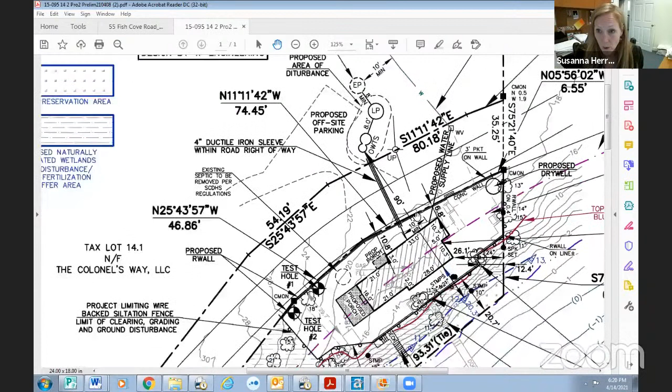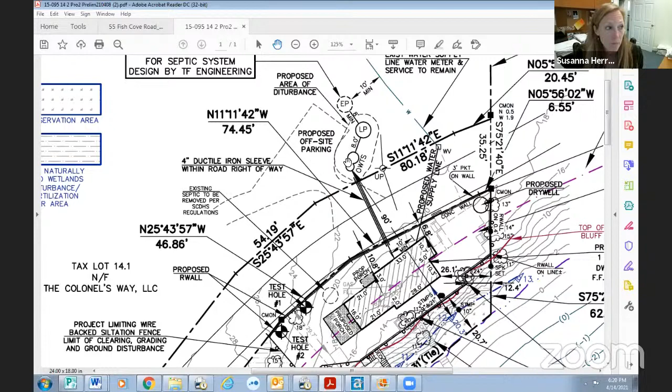Because they own the property across the street, and because this property is highly constrained, we've agreed to locate the sanitary system across the street on their other property, which is about 20 acres. There's plenty of room so they can achieve a much better wetland setback. It will be a denitrification system on the opposite side of the road. The existing system is probably 20 feet from the wetlands line, so we're greatly improving that situation.

In addition, parking for this cottage will be located across the street in an already existing gravel parking area, an offshoot of the main driveway for the adjacent property, used for parking for this proposed house. Obviously easements would be required for that, but we're willing to go through that process to get an easement from one property to the other, and also from the town to put the septic line underneath the road.

The existing house is 8 feet from the wetlands. We've kept pretty much the same square footage, a little bit more living space compared to the existing house, which is all on the survey here. The coverage stays basically the same. They're eliminating the boathouse and the shed, and the new house would have a footprint of 977 square feet. It's just a 1-story house with a screened porch.

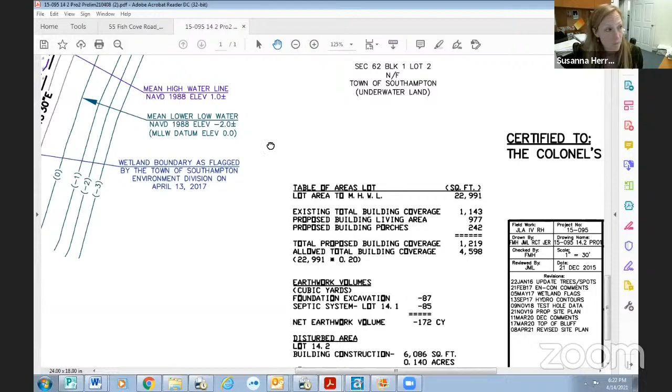It's been designed to be as long and skinny as possible in order to achieve the best possible wetland setback and setback from the top of the bluff.

As I mentioned, the retaining wall that goes along the top of the bluff will be removed. There's also a retaining wall along the street that's going to be reconstructed. But we've made great efforts and met with Marty a couple times at the property and made multiple revisions to downsize the house and improve the proposed site plan as much as possible. A lot of work has gone into the project.

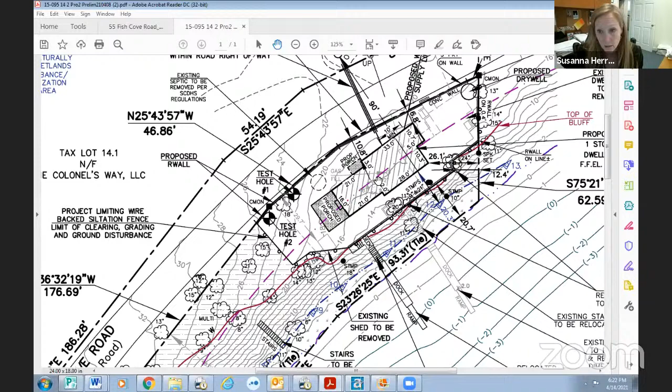We've also presented a revegetation plan. Can you see that? There's only a tiny area of lawn on the property and a 5-foot gravel walkway that would go around the house, and the rest of the property would be revegetated with native vegetation according to this plan.

There's existing steps that go down the bluff to a dock that needs to be reconstructed. That would be reconstructed using open grate decking and non-treated wood. We're also relocating that over to the south, to a location where the bluff is not as steep, so it will have less impact and less potential erosion to the bluff there.

You can see on this plan, it's a little harder to see on the survey, but you can see the circles here. These are all trees that are to be preserved and protected. The landscape architect has put together a tree preservation plan where there's a secondary project limiting fence that will be added after the initial house is removed in order to protect the roots as well as the entire tree.

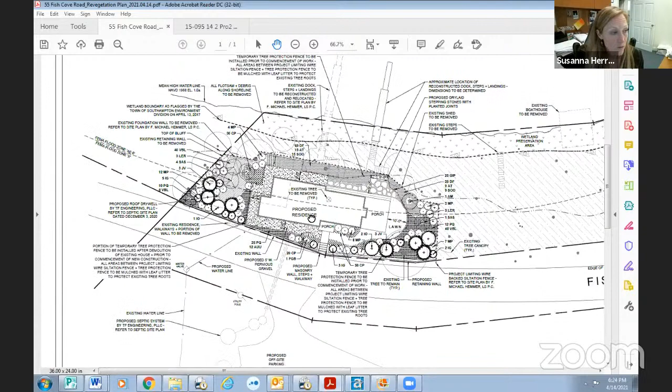So the homeowner is very vested in protecting the environment and protecting the property, preserving the bluff, preventing erosion, and we've tried to put together the best possible project for this site. We've put in a lot of work. So if anyone has any questions, that's basically the project.

Susanna: the purpose of the retaining wall? The one along the road, no, the retaining wall that's there now is to be removed. It's been there probably for 100 years. It only goes down about 7 to 12 inches below grade, so it's not really doing anything right now.

The existing foundation wall of the existing house, as I mentioned, is 8 feet from the wetlands and right at the edge of the bluff. That retaining wall/foundation wall is what's holding up the house. And there's actually a tree growing out of that. I don't know if I have a good picture of that.

Why are we removing the retaining wall? Because it's not providing any structural support at this point and is only going to continue to crumble and cause potential erosion.

Well, my concern is if you remove what you have there, is it possible that there may be some erosion into the cove? I don't think so. We're going to have a project limiting fence put in place ahead of time, and the foundation and the retaining wall are going to be removed by hand. There's no heavy machinery required. I mean, over time, and rainstorms and so forth and so on.

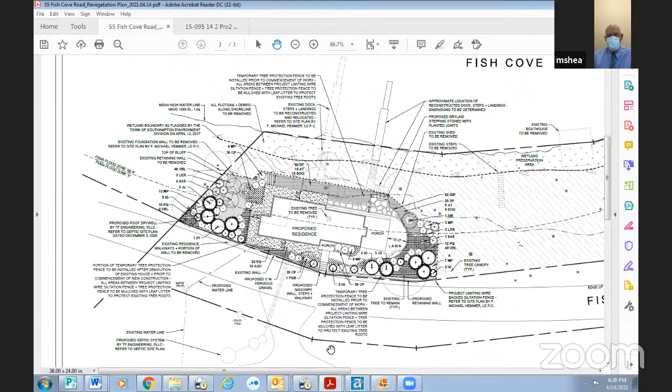As you can see, when Karina panned out, this is actually a very long piece of property along the shore of Fish Cove. The entire remainder of the property outside of the new house footprint is going to be covenanted as a wetland preservation area and naturally vegetated wetland non-disturbance, non-fertilization buffer. In addition to the boathouse, there's considerable storm-borne debris along the shore, which the applicant has agreed to clean up.

As was indicated by the applicant, one of the primary focuses of our evaluation of the site conditions was not only slope protection, but preservation of the existing large trees at the site. Whereas earlier plans, as discussed in my preliminary advisory report from July 22nd, 2020, could have resulted in very significant impacts.

This plan that you're seeing is well thought out. It works for the site. It has the environmental sensitivity that's needed. So I can say that I fully support this plan.

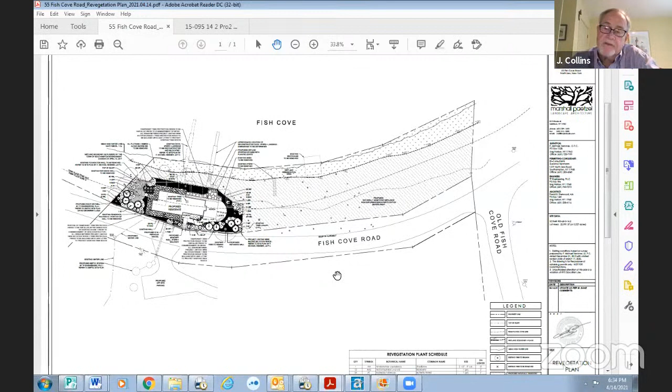Excuse me, Susanna, this is Jerry Collins. Do you anticipate any problems with cutting into the road to bring the septic system, plumbing over to the other side? Have you approached the town about that?

Just very preliminarily, but we don't anticipate that there will be a problem. It's been done before. I've spoken with the health department, who I assumed would have issues with it, but they have approved much bigger projects where the septic system is across the street, including, as Marty pointed out to me, the new condos along the canal. Those have a septic system across the street, and an easement was worked out with the town for that situation. So I don't anticipate that there will be a problem with that.

Good, I think it's a great plan. I'm happy to see it. I didn't think it was possible to put the septic across the street, but I've been proven wrong, to my surprise. So the applicant has agreed to do that, and we don't have to cut down trees for that. That was the way we were able to save a lot of the trees that were going to come down, because in order to put a septic on this site, we were going to need retaining walls and regrading and a long septic system with lots of rings. So this is a much better system. Absolutely, yeah, it's a great plan.

Susanna, two questions. One is, what is the setback from the bluff of the new house? It's 10 feet. And with the existing house, it's 0.

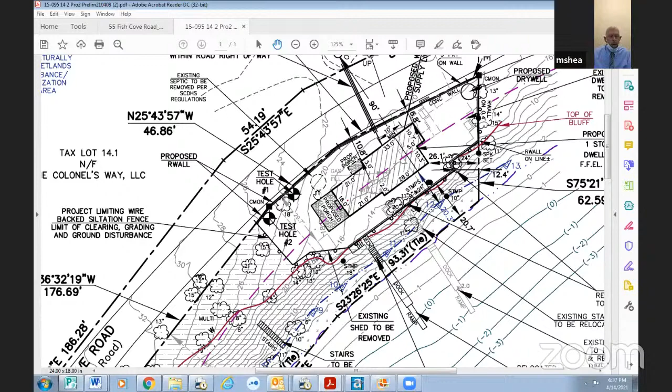I can also assure the board that in the event the Suffolk County Department of Health Services wants to see a generator, I'm happy to work with the applicant to find an appropriate location for that generator. I also don't think it's going to be necessary, but in the event that it is necessary, we can locate that on the site within the planned site disturbance area.

A generator for the septic system would not be a very large generator. It doesn't use very much power. Or you could get an easement to use the bathroom on the other side of the street too.

That's a joke. What's with the house on the other side of the street that they own? They own both properties, you said, right?

Well, there's an existing house on this site. It is a single and separate lot. And it would not be permissible under zoning to put another cottage on the property across the street.

This house that's on there now, in the present condition, when was the last time someone lived in it? I don't know off the top of my head, but not since we started this process a couple years ago. Pretty dilapidated, correct? Correct. I think this is a horrible plan.

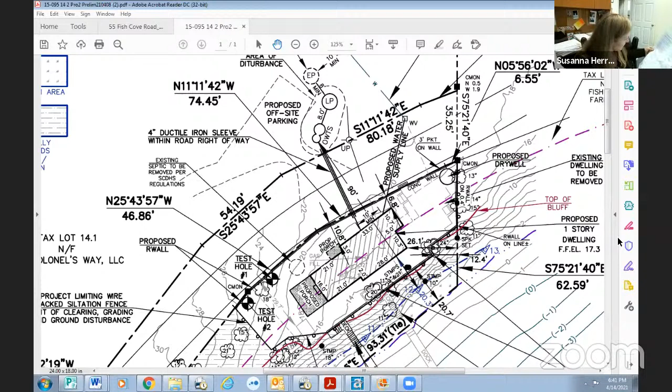The lot area is over half an acre, 22,991 square feet. Most of that's being preserved. And just to correct the numbers for the record, the existing house is 8 feet from the wetlands. The new house would be over 20 feet from the wetlands.

Let me zoom out. You may be getting a false impression because I'm so zoomed in on the small area of the building. Here's the entire lot. Everything on the southern portion of the property is going to be left completely natural, and it's heavily wooded. We located some of the trees on the property, but we didn't locate every tree in the forest. So this entire area—it's not a forest, it's a wetland.

Well, it is on wetlands, but most of the property is forested, and we're cutting down only one tree in order to reconstruct a house farther from the wetlands. The septic system that's there now is probably 20 to 30 feet from the wetlands, and is just a hole in the ground. So we're putting in a denitrification system across the street, which is obviously far superior.

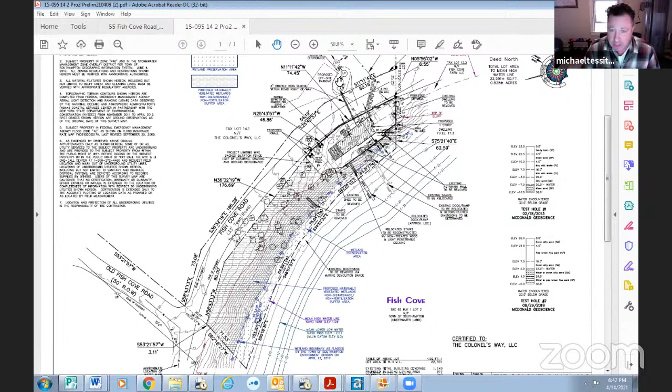I think that's great. I think that's awesome that you thought outside the box to do that. I just think that this project's ridiculous.

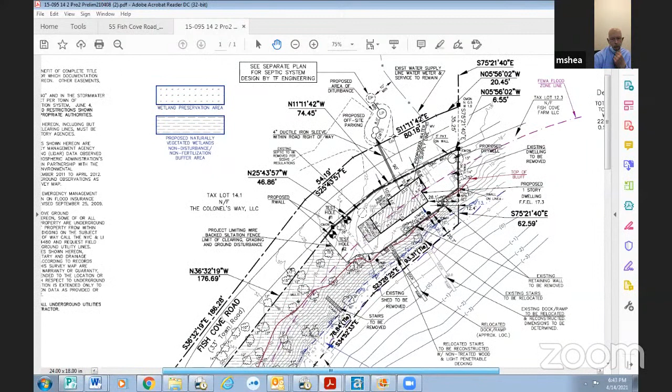We had initially explored whether or not the existing residence could be repaired or partially reconstructed in the same footprint. I had a lot of concern about doing that because the existing residence is perched right at the edge of a very steep slope, and there's a crumbling supporting retaining wall. So I thought it made a lot more sense, rather than try to repair that house in its existing location, to build a new house on the flatter ground.

The house, of course, is pre-existing non-conforming, so the landowner benefits from grandfathered setbacks from the road. That's what enables the landowner to build within very close proximity to the road. As indicated in my preliminary advisory report, I had very significant concerns about trying to reconstruct the house in its present location.

This plan again is the product of the applicant and I spending a lot of time considering various alternatives. The possible location of the sanitary system across the road was one of the recommendations I made early on, and it's good to see that has worked out, because I think if we had to locate the sanitary system adjacent to the residence, it would be very difficult to rebuild the residence without very significant adverse impacts. I don't think you could build a residence where that building was.

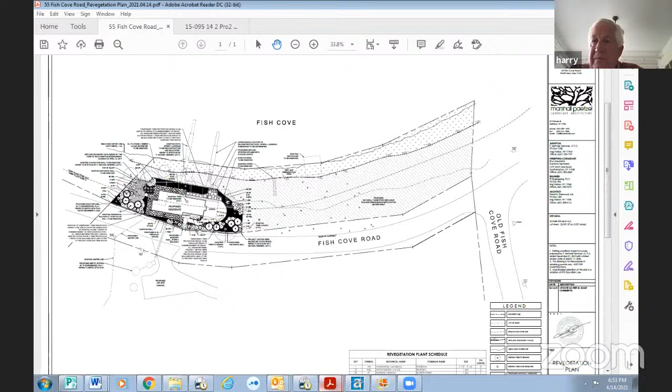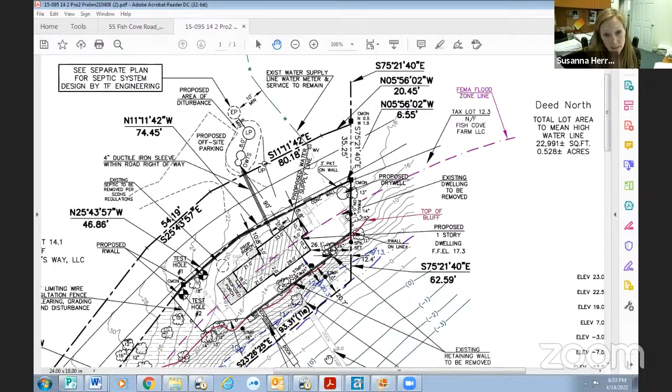Yeah, we did explore that opportunity. One reason this project has taken so long to come to a hearing is because we've been exploring different alternatives and meeting with staff to improve the project, to look at every potential impact and to mitigate that and to lessen that to the greatest extent possible.

If you look at the footprint of the existing house, it's very close, within a couple feet of the property line, and this adjacent property is wooded. So if you were to try to dig a new foundation, which would be necessary, the foundation that's there is not in a condition that could really be preserved. It needs to be replaced. It's crumbling, not constructed to current standards as far as the safety of the foundation, stability.

In order to dig a new foundation in this area, if you walk the property line, you'll see there are trees, and the roots for those trees would have to be severed. You would risk damaging the roots on the adjacent properties.

Removing the house can be done quite easily because the foundation is not very deep, and it could actually be done by hand with no heavy equipment. So that's something that's been taken into consideration. You just haven't been part of that.

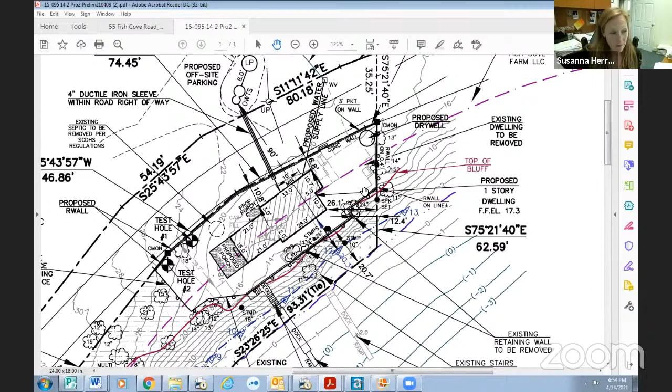I actually wanted to bring this to the board much sooner and show you all the iterations we've been through. The house has been looked at from every possible angle, different locations, flipping the house and the septic system on site, building in this footprint, expanding to the south.

Then when we realized we could put the septic across the street, it became very obvious that the solution was to move the house to the flatter, clear part of the property where we could achieve a greater setback in a location that is not as steeply sloped.

The bluff in this portion of the property is not nearly as steep as it is directly in front of the existing house. So by constructing a new house as opposed to working within the existing footprint, you can redesign it so it's skinnier and thereby achieve a better wetland setback.

We're going from an 8-foot wetland setback to 20.7 feet. And we're going from a 0 bluff setback to 10 feet, in an area that's much more stable, much flatter, and we don't risk injuring the trees that surround it, with the exception of one lone tree that unfortunately sits right in the center of this area.

But if you were to reconstruct in the initial location, you would risk all of the trees along the property line here and the bluff. So this is a much better solution.

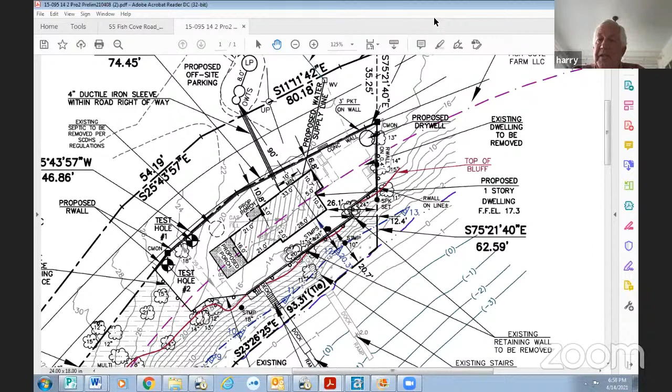And if any other board member wants to chime in, I'm all ears. Essentially, what it comes down to is how many board members want to close this hearing, how many want to adjourn it. I want to adjourn it. So we've got 2 people that have said they want to adjourn it.

I don't have a problem holding it open one more time. There's 3, I don't care. Whatever's on the next meeting, one more. I would go along with them, not adjourn the meeting, and let Michael and anybody else who wants to see it. I'll agree, go with that as well.

So we have to keep this hearing open for one more. We have 3 hearings scheduled for the next meeting, April 28th, and 3 the following meeting, and 3 the following meeting. The testimony has been done here.

There is not an obvious conflict here that we do sometimes have. And I suggest that perhaps there's not going to be a major conflict, so it may go fairly quickly when it comes up again. I say that hesitantly because I never know for sure.

So I'm going to suggest that we adjourn it then for 2 weeks to April 28th, if that is okay with the rest of the board. I'll make that motion. I'm okay. Second that. It's been moved and seconded. All in favor? Harry, aye.

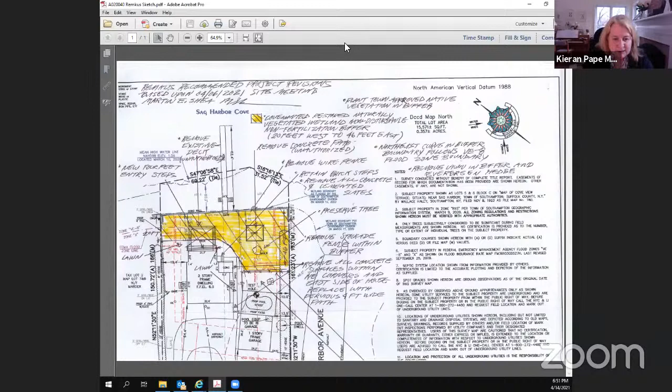Marty was generous enough to take his time and really go through the property with us. It's an old house. It has a pre-existing garage. Marty came up with a plan that allows my client to have a pool, and it also allows for a buffer. He's going to remove his deck. We're very happy with the proposed conditions that we worked out with Marty.

Marty: Yes, we actually probably spent about an hour and a half at the property looking at every practicable alternative for the site, looking closely at the site conditions, the existing improvements, the conditions of the property, and what makes sense in terms of moving ahead. As was indicated during the first hearing, there is an unauthorized deck area on the seaward side of the house, as well as an unauthorized stone patio.

You'll also note that on the east and northeast side of the house, there's considerable concrete slab and cemented slates.

What we found would work out best for this site is to have that deck and patio removed, as well as to take out all of the concrete improvements on the east side of the residence, to replace that cemented walkway with a pea stone path, to maximize the covenanted naturally vegetated wetland non-disturbance, non-fertilization buffer at the property in a manner that protects a large maple on the site.

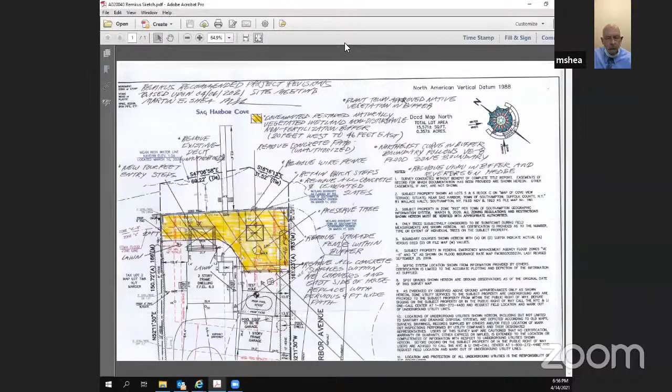So the area where the pool is proposed is an existing disturbed lawn area. The remnants of a lawn on this property are not fertilized or maintained with chemical.

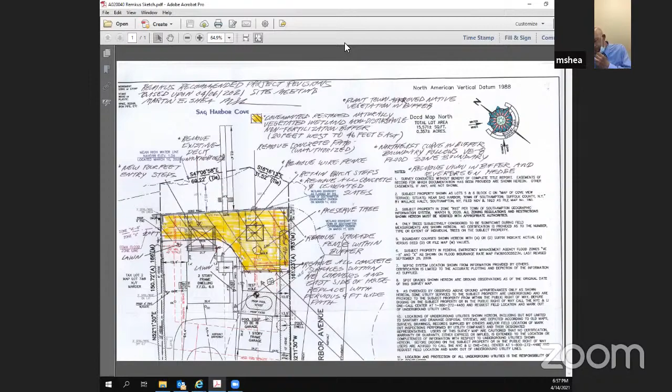Thank you, Marty. Yes. Does the board have any questions? Okay.

Is there a motion to close this hearing? So moved. Close the public hearing. Second. Motion made and seconded, all in favor? Harry, aye. Jerry, aye. George, aye. Ann, aye. Tom, aye. Michael, all right. Sunshine, aye.

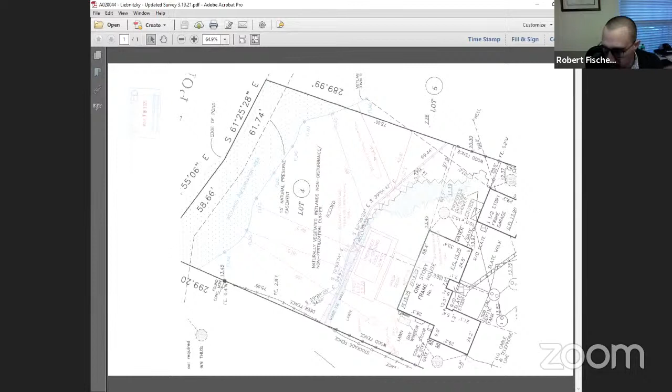Since the last meeting, my client had some good, productive conversations and communications with Marty. They met a couple of times and exchanged some sketches, and Marty went back out to the property to take another look. The result being that the pool was shifted significantly to the west. The wetland setback increased in the various areas to 81.5, 82.3, and 85. This spot on the east, changing from the original 69 we had proposed, to 85 — a significant shift. The buffer is increased, especially on the east side.

This was all brought to a final understanding just in the last day or so, so we have not had a chance to add this to the survey. So what we're hoping — and I'll let Marty confirm for himself — is to adjourn to the April 28th meeting to put this onto the survey. But we believe, and again Marty can confirm, we have some understanding as to what we're doing.

Marty, is that — we don't always have to have all the plan, everything on the survey, in order to close the hearing, but there will have to be an updated survey to issue a permit. Yes, so by all means, we're happy to conclude as much as possible, and then we understand we have to get the final survey.

Okay, all right, Marty? Yes, Karina, if you could put the sketch that I did up on the screen for the board.

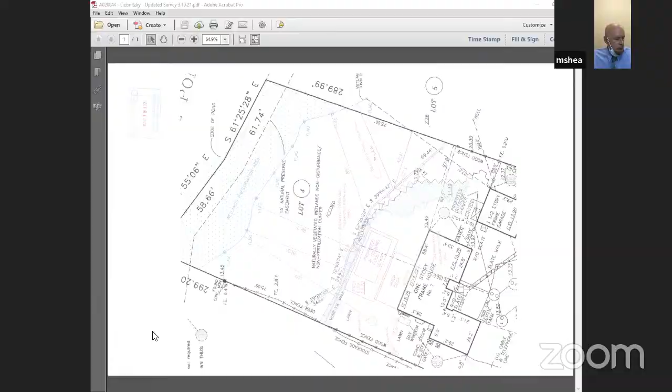I would start by saying that the landowner and I have given this project a considerable amount of attention with regards to undertaking the required practicable alternatives analysis, and the applicant is offering to do several things. Right now, there's an existing treated wood deck attached to the residence. The applicant has offered to demolish and remove that deck and replace it with an untreated deck, which is most beneficial on a property like this that fronts a freshwater pond.

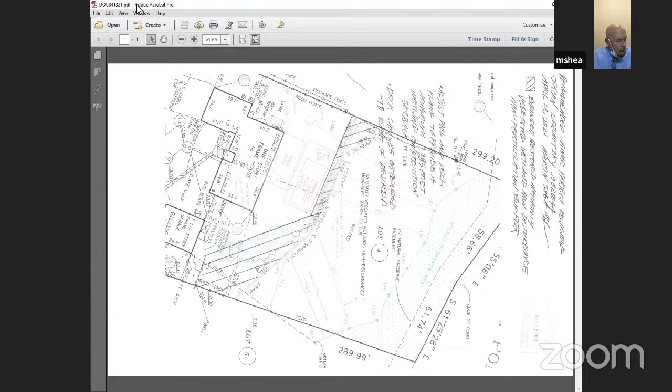The applicant has, by redesigning the pool and the new deck and shifting the improvements to the west, significantly increased the wetland setbacks by as much as 20 feet from the former plan that was considered at the last hearing.

The applicant is also agreeing to provide for considerable additional woodland buffer. The east side of the property, to the right of the pool, is an area that gradually slopes down towards wetlands, whereas the area where the pool and deck is proposed is flat, level ground, much more suitable for building. The slashed area you're seeing on this plan is the additional covenanted restored buffer zone that I have recommended, which the applicant has wholly agreed to. That would enable us to expand upon the existing forest in the most environmentally sensitive areas of the property.

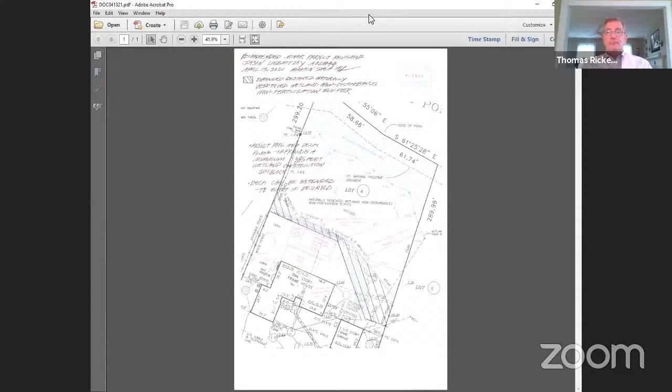Motion to close the public hearing. Second. All in favor? Harry, aye. Jerry, aye. George, aye. Ann, aye. Tom, aye. Michael, aye. Sunshine, aye. Thank you.

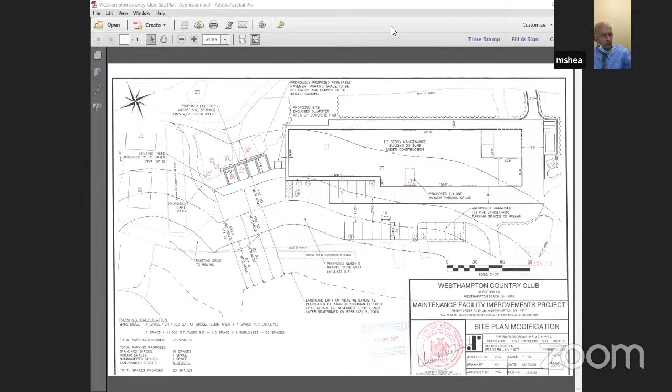Motion to send those comments to the planning board. Second. All in favor? Harry, aye. Jerry, aye. George, aye. Ann, aye. Tom, aye. Michael, aye. Sunshine, aye.

For the ZBA, Liliana Danzo. Briefly, this is a site that is partially in the Village of Quogue and partially in East Quogue. It's an existing residence that borders a freshwater creek.

The Conservation Board had issued a wetlands permit in order to make some minor improvements to the existing residence. The permit was conditioned upon establishing a covenanted wetland preservation area and restored buffer area, which the applicant has agreed to.

The plan does need minor variances from the zoning board. They had submitted an initial survey, which was not entirely consistent with the Conservation Board approved survey. The ZBA has just forwarded an updated survey today, which is consistent with the plan approved by the board.

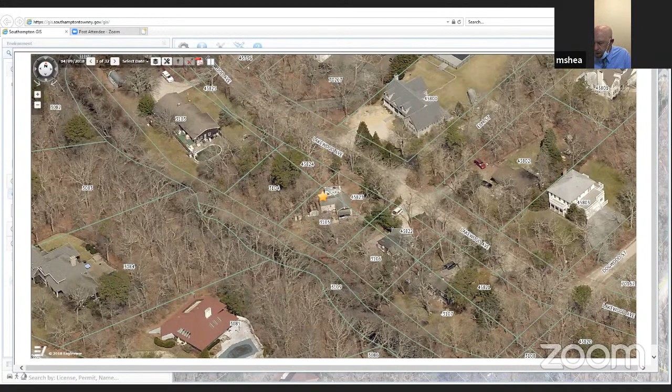So this is an advisory report which supports the necessary relief in order to go forward with the Conservation Board approved plan.

Motion to send those comments to the ZBA. Second. All in favor? Harry, aye. Jerry, aye. George, aye. Ann, aye. Michael, aye. Tom, aye. Sunshine, aye.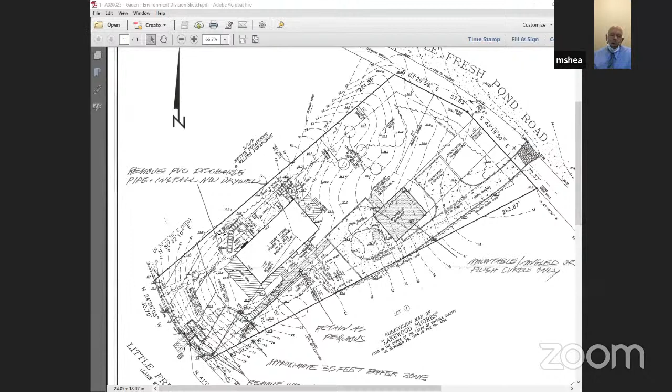The current drive slopes down from Little Fresh Pond Road to a pervious stone parking area. There's an island with mature mountain laurels that aren't faring that well. The applicant has been attempting to prune them so that they'll recover, although the applicant is now proposing a parking area that would require removal of those mountain laurels. He is willing to attempt to salvage and relocate those mountain laurels to the seaward side of the house.

The meeting with the landowner was a good opportunity to educate them about concerns regarding deck construction along pond shorelines. We spoke a lot about the issues related to stormwater runoff and the risk of contamination when you have a sloping lawn. The deck was actually built with treated wood, so the applicant was proposing to remove the treated wood and replace it with untreated wood.

The deck was built in a pre-existing small brick patio area. The applicant has since agreed to remove those wooden improvements in their entirety to create a simple, heavily wood mulched path leading down the slope to the pond shore, and to establish a significant buffer on the pond side of the house. The lawn would be taken up and the area restored with sweet pepper bush, mountain laurels, sedge, and other indigenous vegetation.

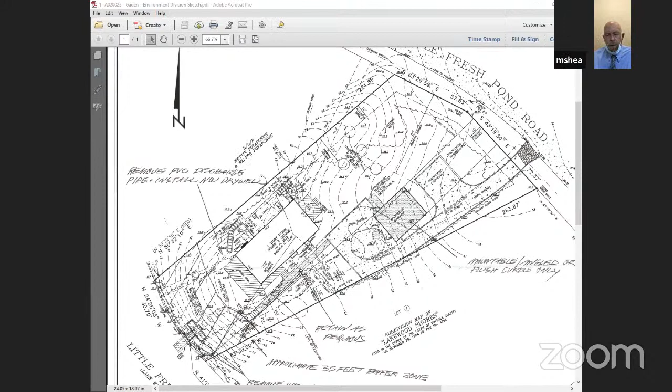So the applicant well understands the need for these changes to his plan, as well as to establish a naturally vegetated, covenanted buffer. As the applicant has agreed to the recommended mitigative measures, you have sufficient information to make a determination on this application. Accordingly, I'm recommending that the public hearing requirement be waived.

Motion to waive the public hearing? Second. Resolved that the Town Conservation Board hereby waives the public hearing pursuant to Chapter 325, Section 325-80 of the Town Code. All in favor? Harry, aye. Jerry, aye. George, aye. Ann, aye. Tom, aye. Michael, aye. Sunshine, aye.

A021004, Laura Boden and Lucas Torres. This application relates to a house which is undergoing renovations along the well-developed Grant Boulevard in the hamlet of Hampton Bays.

As indicated in my April 12, 2021 advisory report, the property has frontage on a dug basin, referred to as a yacht basin. It has a very narrow boating navigation inlet that connects to Tiana Bay, so it is an area where we need to be concerned about maintaining surface water quality.

The shoreline of this property has been impacted in years past. There are some boulders along the shoreline, as well as a mix of high tide bush and reeds, as well as decks at grade. The applicant is looking to install a ramp on the landward side of the house for a physically challenged person, also to construct a planter on the landward side of the house.

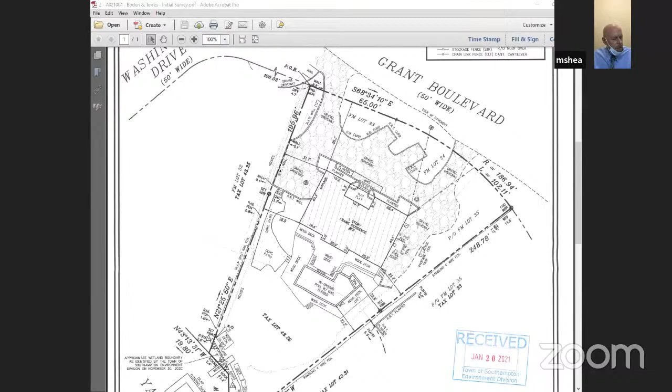This is an application for which we have sufficient information to make a determination. As such, I'm recommending that the hearing requirement be waived.

Motion to waive the public hearing. Second. Resolved that the Town Conservation Board hereby waives the public hearing requirement pursuant to chapter 325, section 325-80 of the Town Code.

All in favor? Harry, aye. Jerry, aye. George, aye. Ann, Tom, aye. Michael, I'm gonna abstain from that one. Sunshine, aye.

A021022, Paul and Susan Matuszewski. This property has frontage on an interior bulkheaded canal in the private community of Shinnecock Shores in the hamlet of East Quogue. The application has been made because, as you can see, the applicant is looking to get a permit to undertake substantial renovations and additions to the existing residence.

Also, to add a pool and spa and paver patio area. The property is characterized by a vertical concrete block wall that separates a corridor of lowlands along the bulkhead that's about 25 feet in width, that contains some existing natural vegetation. That wall separates that lowland area from the higher land where the current house and proposed improvements are planned.

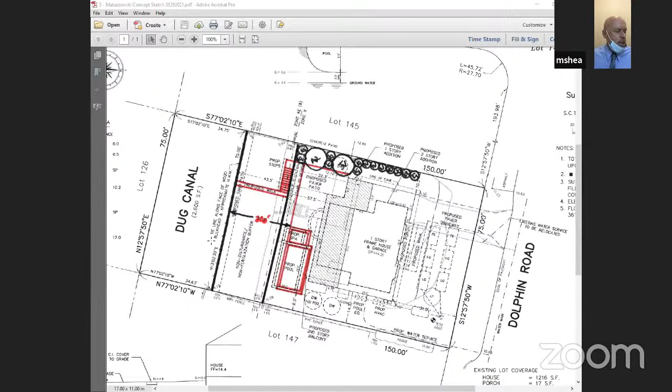The project plans shown to you are consistent with the direction that the Conservation Board has taken with similar applications. We do have sufficient information to make a determination, as such recommending that the hearing requirement be waived. I should also mention that, as indicated on that plan, the applicant is installing an I/A OWTS as well.

Motion to waive the public hearing. Second, second. Resolved that the Town Conservation Board hereby waives the public hearing requirement pursuant to chapter 325, section 325-80 of the Town Code. All in favor?

Harry, aye. Jerry, aye. George, aye. Ann, aye. Tom, aye. Michael, aye. Sunshine, aye.

A021031, Bus C. Lazarakis and Anastasia Lazarakis Carlotsis.

This application relates to property on Big Fresh Pond Road in the hamlet of North Sea, on the opposite side of the road from Big Fresh Pond. As you'll see in the northwest corner of the property, there are freshwater wetlands that extend into the adjacent property that is under redevelopment pursuant to a wetlands permit, where there's freshwater pond and red maple swamp.

This is a property that has some history, in that years ago the Conservation Board had issued a permit that allowed for some improvements to the existing residence. The permit was conditioned upon establishment of a maximized restored covenanted naturally vegetated wetland non-disturbance, non-fertilization buffer that takes in descending land between the house and the adjacent freshwater wetlands.

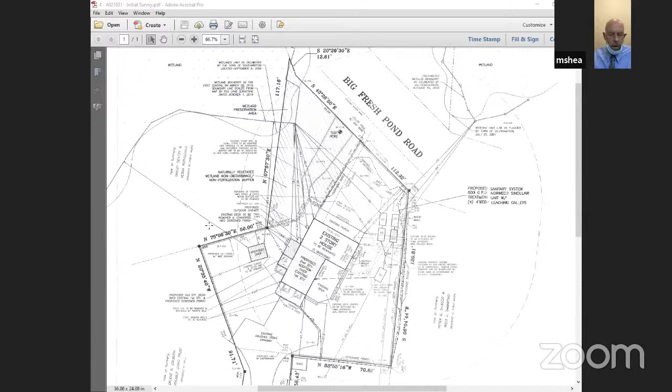Motion to waive the public hearing. Second. Resolved that the Town Conservation Board hereby waives the public hearing requirement pursuant to Chapter 325, Section 325-80 of the Town Code. All in favor? Harry, aye. Jerry, aye. George, aye. Ann, aye. Tom, aye. Michael, aye. Sunshine, aye.

A021033, 8 Square Holly Lane LLC. As indicated by the preliminary report dated April 12, 2021, this application relates to an existing fully bulkheaded property that is in the hamlet of Watermill and fronts on Myers Pond. Upon responding to a lot inspection, notwithstanding the bulkhead, I did find that there was a very small area of freshwater wetland in the far southwest corner of the property.

The applicant has agreed to preserve that poorly drained area, to establish a perimeter buffer, and also to establish a buffer the full length of the bulkhead. The plans as indicated would call for redevelopment of the site and a setback of 50 feet or greater from the bulkhead, the on-site wetlands.

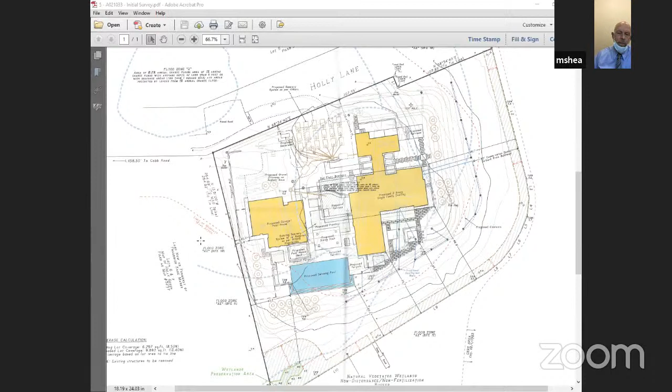A new innovative alternative on-site wastewater treatment system would be installed. The wetlands would be covenanted as well as the buffer. This is an application for which we have sufficient information to make a determination. As such, I'm recommending that the hearing requirement be waived.

Motion to waive the hearing. It's moved, and is there a second? Second. Resolved that the Conservation Board hereby waives the public hearing requirement pursuant to Chapter 325, Section 325-80 of the Town Code. All in favor? Harry, aye. Jerry, aye. George, aye. Ann, aye. Tom, aye. Michael, aye.

Sunshine, aye. Resolution to issue modification, CB 200002, Marina Sapir Zatz and Boris Zatz. Any discussion? Move to issue. Second. Resolved that a wetlands permit modification be issued to Marina Sapir Zatz and Boris Zatz for the proposed project upon the terms and conditions set forth therein.

All in favor? Harry, aye. Jerry, aye. George, aye. Ann, aye. Tom, aye. Michael, aye. Sunshine, aye.

Resolution to reschedule public hearing, A020025, James Esposito and Jennifer Esposito. Is there a motion to reschedule to May 26th? So moved. Motion to reschedule. Second. Resolved the Town Conservation Board hereby reschedules the public hearing to May 26, 2021.